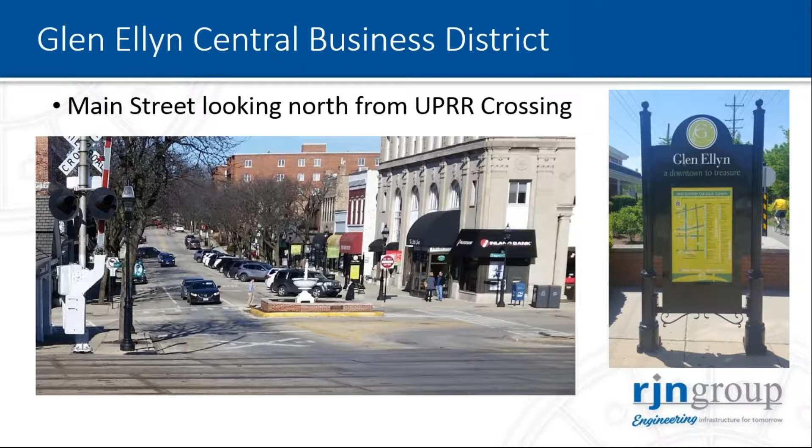There is continuing development interest in downtown Glen Ellyn with some major projects proposed. So there's been no lack of attention to the CBD by the citizen and business communities, and with the recent board approval of a new revenue source, coupled with the previous establishment of a TIF district in the CBD, funding is now in place to move ahead with projects.

The last major makeover of the downtown area occurred in the mid-1980s with comprehensive projects to install curbs and sidewalks, street lights, trees and sidewalk grates, some street furniture and accessories, and resurfaced roadways. Underground work at that time included significant drainage improvements and new water mains to replace or augment existing facilities. Over the years, parking lots have been both reconstructed and rehabilitated.

In 1998, all the central business district roadways were resurfaced, a project that was immediately preceded by various sanitary sewer spot repairs and limited sanitary sewer main replacements. Undergrounding of utility wires has taken place in portions of the downtown area. In addition, sidewalk and tree maintenance are routinely performed on an annual basis.

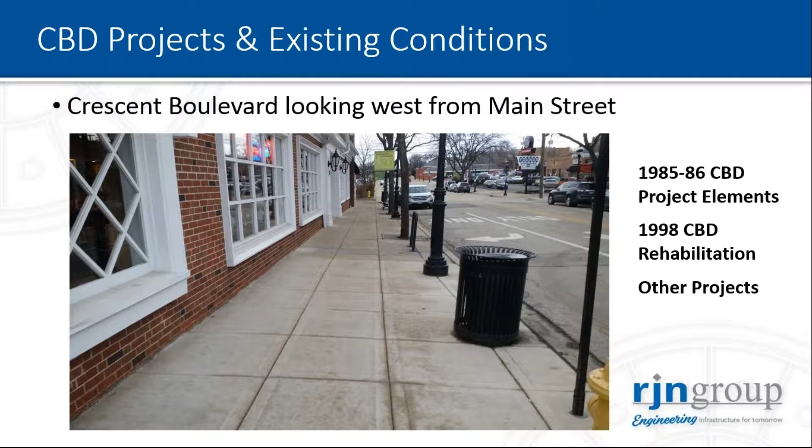So what is our current infrastructure condition? For surface elements, the roadways, sidewalks, and trees are looking a bit tired and exhibiting growing deficiencies. Underground? Well, things work reasonably well for the most part, but there's never been a thorough and comprehensive inventory and examination of our existing systems. We have 100-year-old water mains on Main Street and nearly 100-year-old sanitary sewers.

What is the state of the underground infrastructure overall, particularly underneath the railroad tracks? We have I/I issues. Are there any or many clear water connections in the CBD? Why are there 3 or 4 parallel storm sewers in some corridors? These are some of the many questions that we would like answered.

So as we embark on this major rehabilitation effort in the CBD, we want it to look good, function well, provide opportunities for greater and varied public and business use, and deliver reliable and improved water and sewer system performance. Our first step was to obtain that comprehensive assessment of our CBD underground facilities. The village retained the RJN Group in 2017 to perform a central business district underground utility study, and here to describe that work is Carol Jokas.

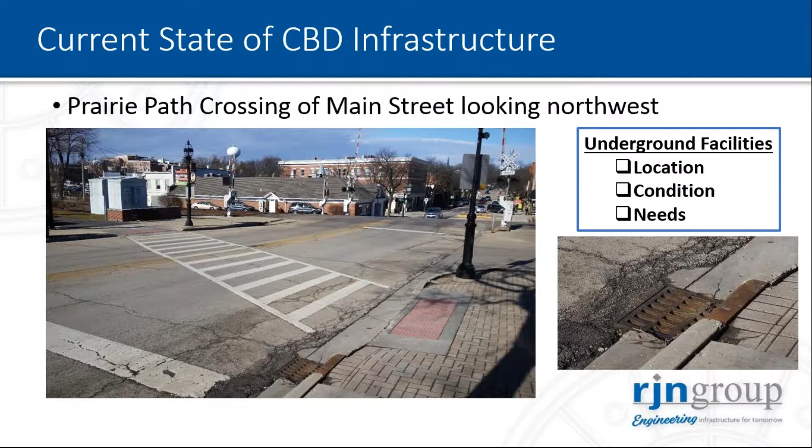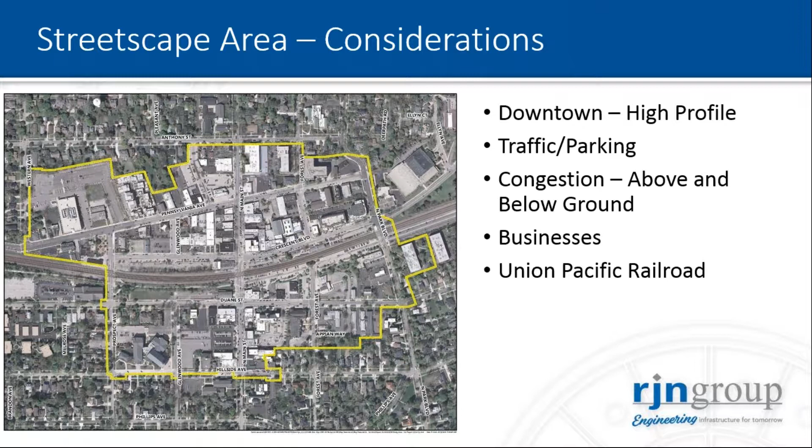Thank you, Bob. So as Bob mentioned, we're looking at the central business district for Glen Ellyn. It's kind of the heart of the village, so this is a very high-profile area. There's a lot of traffic. You have to be concerned about parking. Congestion can be an issue both above and below ground. You have to be concerned about keeping businesses on board with what you're doing. And then, of course, there's the ever-present Union Pacific Railroad that cuts right through the heart of the central business district.

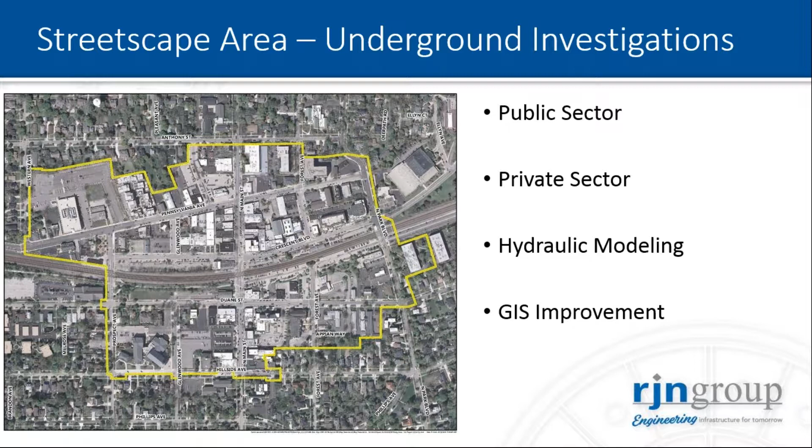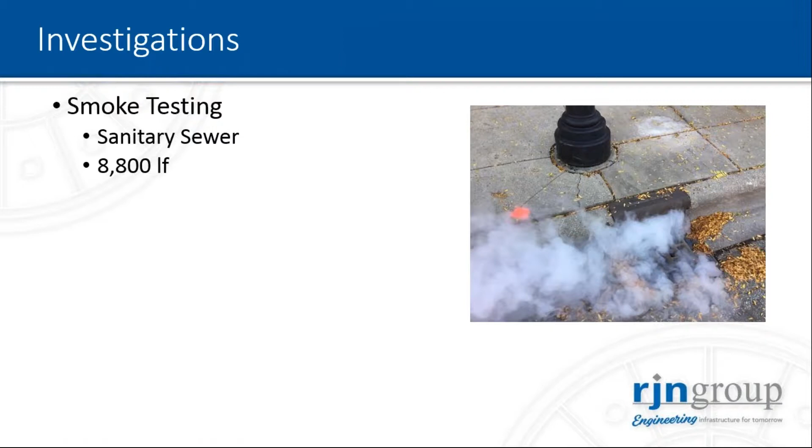So for our underground investigations, we evaluated the public sector and private sector elements, and we did some additional hydraulic modeling for the village, and worked with the village to improve the GIS, their asset inventory of what is there in the central business district. The investigations, many of them, are pretty standard. We smoke tested about 8,800 feet of sanitary sewers in the CBD. Performed inspections of all structures, sanitary and storm, manholes, catch basins, inlets, vaults, everything in the CBD.

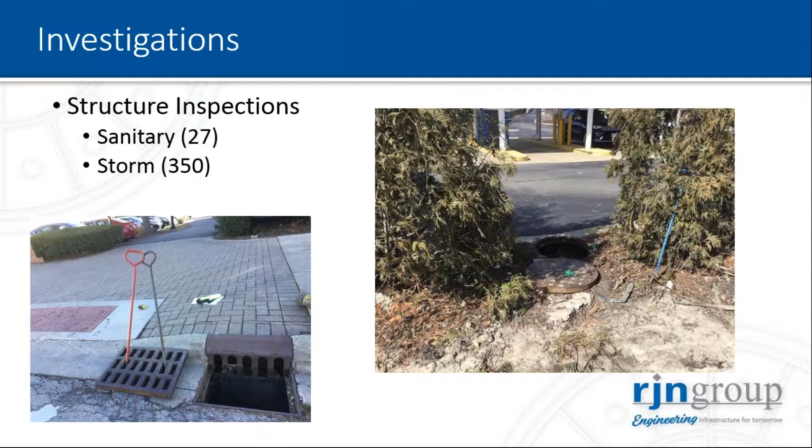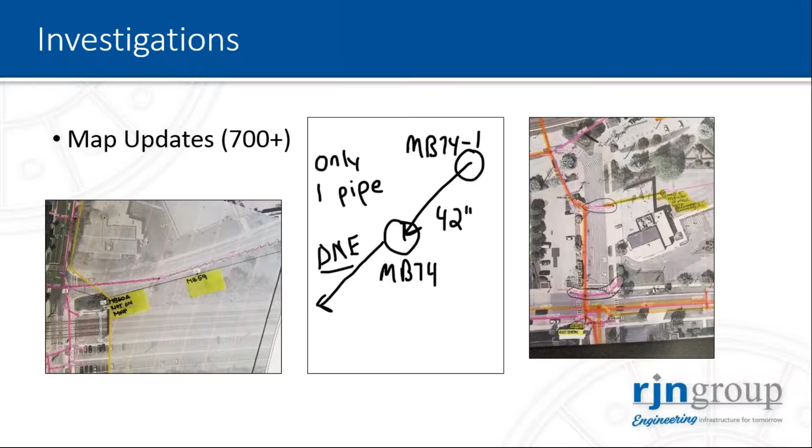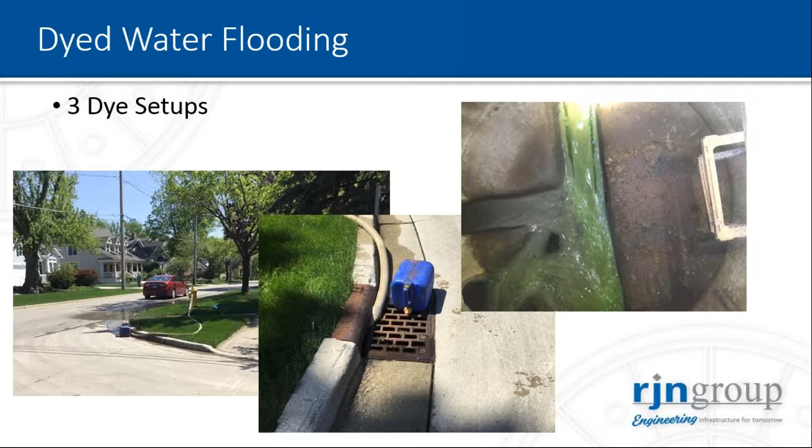And as you might imagine, the more you investigate in an older area of town, the more you find out that your GIS is a little bit lacking. So we had a lot of map updates as we went through this entire process. When you do smoke testing in an area and you find potential storm sewer and sanitary sewer cross connections, what we do is dye water flooding. We did 3 dye setups within the village to try and pinpoint where those cross connections were occurring.

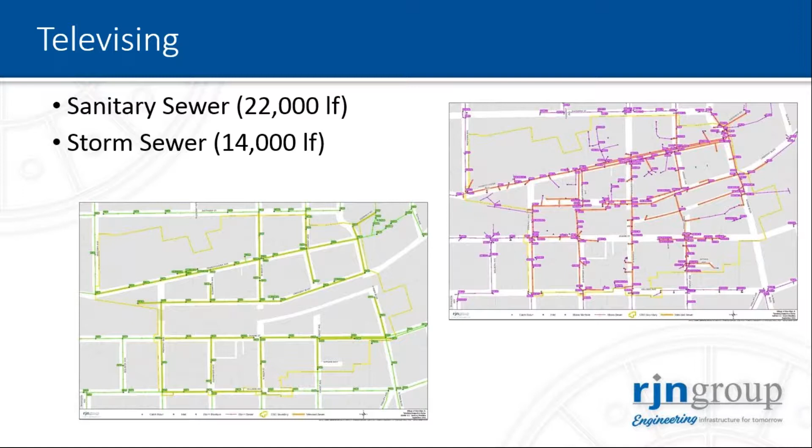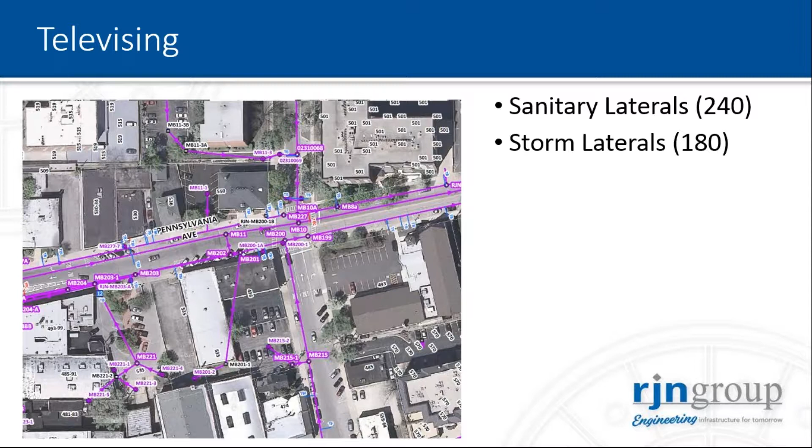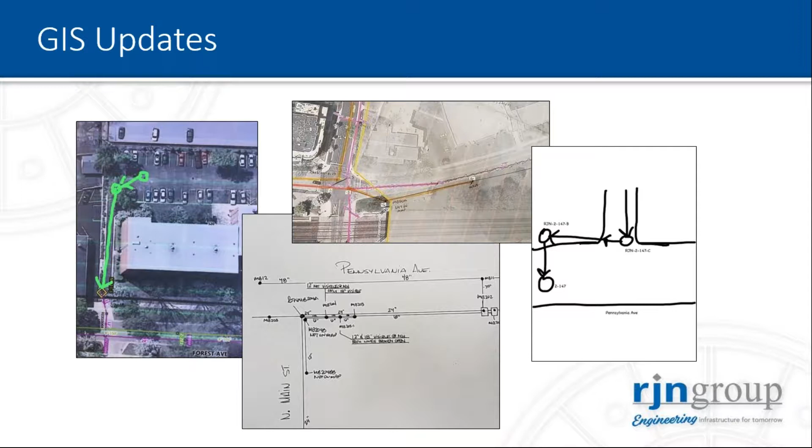All of the sanitary sewer and the storm sewer in the CBD was televised. That was done by Michaels. And all of the laterals in the village were televised, sanitary laterals and storm laterals. And the televising encompassed all of the pipes, even everything connecting catch basins and inlets and all of those little short pipes in the storm system. Again, a recurring theme. The more you investigate, the more changes to your GIS you're going to find. New structures, structures that don't exist, different connections, different directions. A lot of work was done to update the GIS for the village.

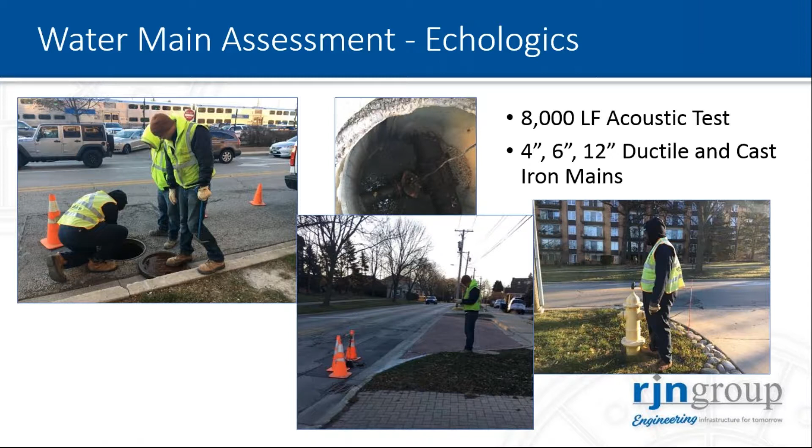The water mains in the central business district were assessed. Selected ones were assessed by Echologics using acoustic testing. That's of the ductile iron and cast iron mains. About 8,000 linear feet were tested. Note that not all of that was in the CBD. Some of that testing was done in an area outside of the CBD, but a total of 8,000 feet were tested.

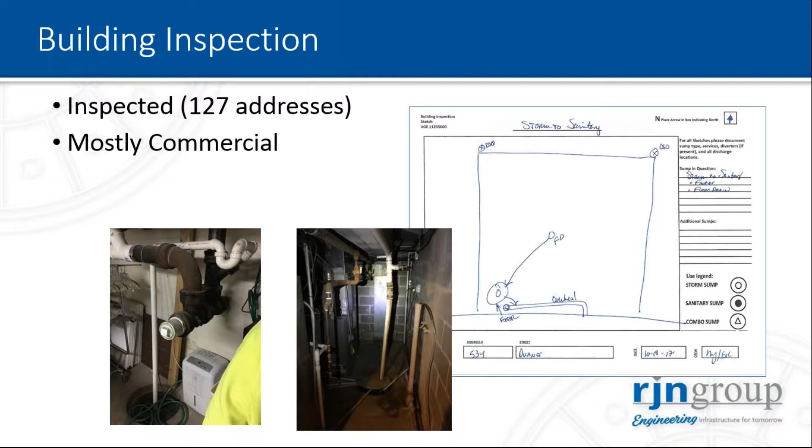And, as Bob mentioned, it's important to know that all the connections to your sanitary and storm sewers are legal, are in good shape, and you want to know that all the connections into those systems are proper. So building inspections were performed, and these are mostly commercial buildings, many of them quite large. And these are very involved inspections. About 127 addresses were inspected in the CBD.

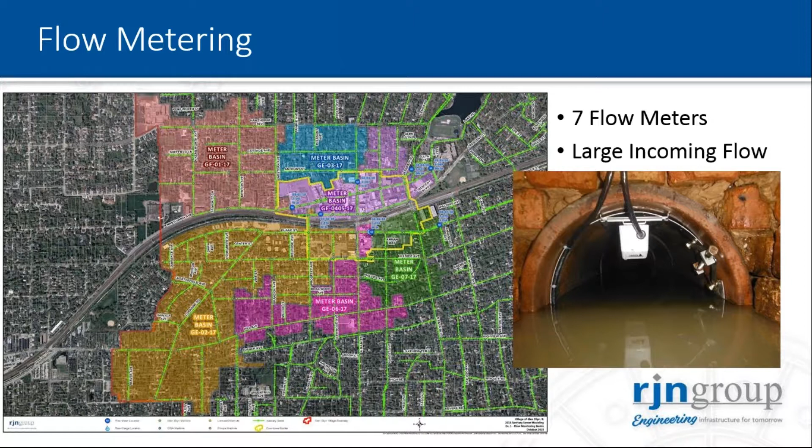Flow metering was performed, and as you can see, the CBD is identified by that yellow outline. Most of the flow is coming from outside of the CBD. It's kind of a pass-through area. It comes in from the northwest and south and then exits out the east. 7 flow meters were installed for a 90-day metering period.

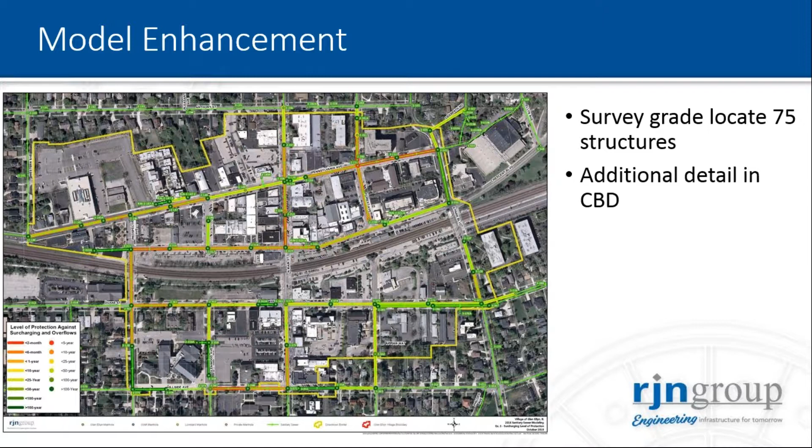And the sanitary sewer model that RJN has developed for Glen Ellyn, that model is a village-wide model, but the Central Business District area was updated and enhanced. Some additional survey grade locates were performed within the CBD, and that survey grade locate was done on the sanitary manholes, but also we picked up many storm manholes for enhancement of the GIS.

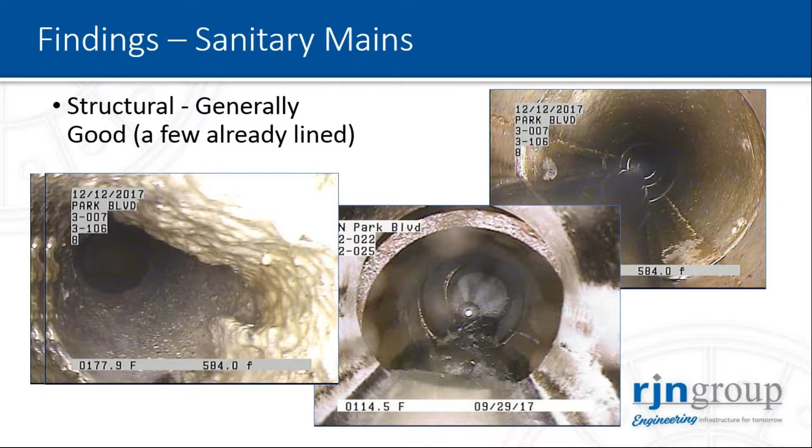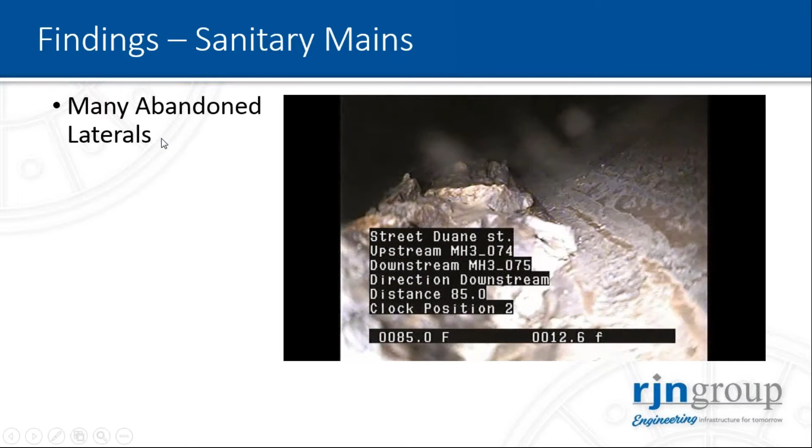However, there are... oh shoot, sorry, I'm gonna turn the volume off. Here we go, sorry about that.

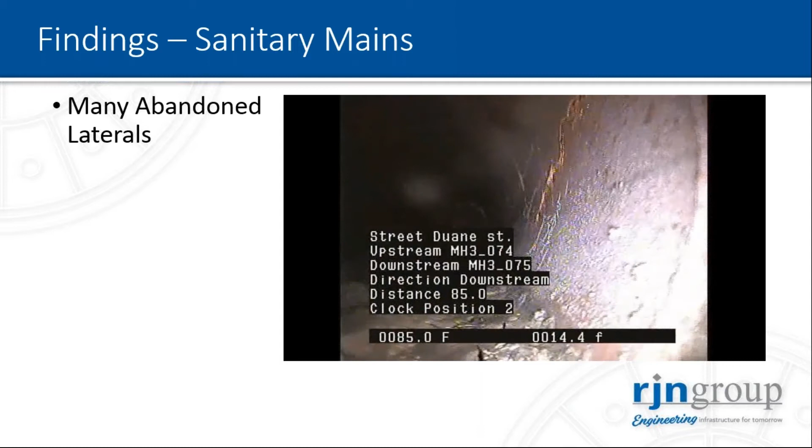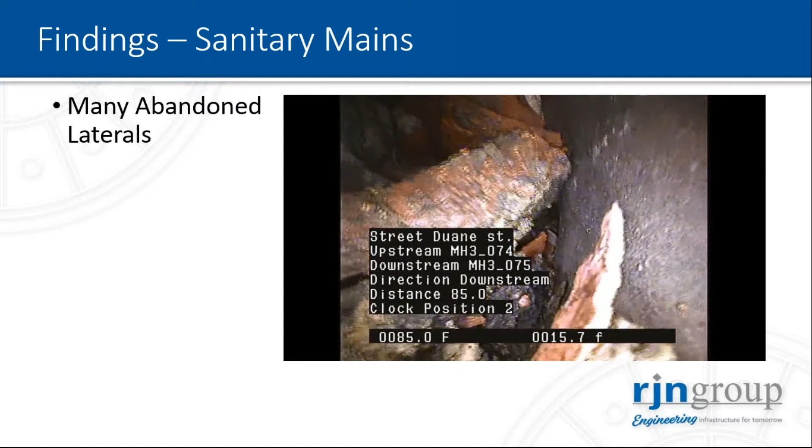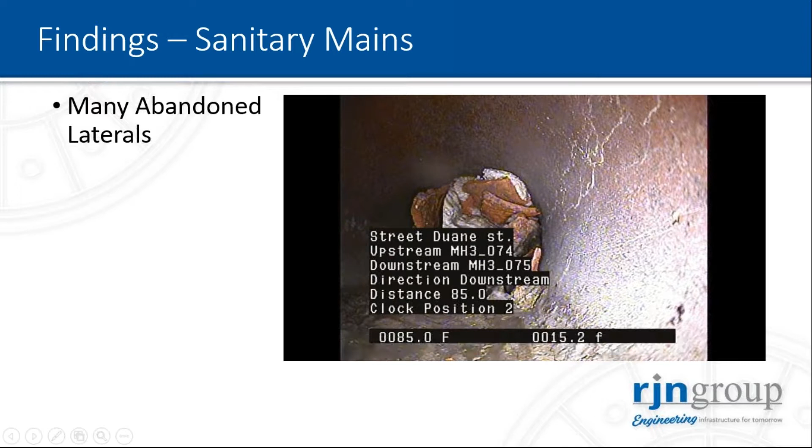What we find in many communities, once you start actually looking at the laterals, is that the laterals are not in very good shape, and there are many lateral connections that go up 15, 20, 30 more feet that are then abandoned. Here we have a contractor's cap special. This is an abandoned lateral. And this is the kind of thing that you don't want to see.

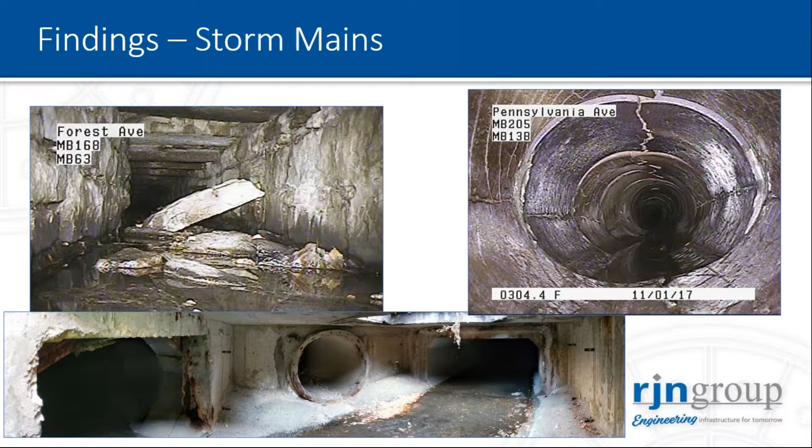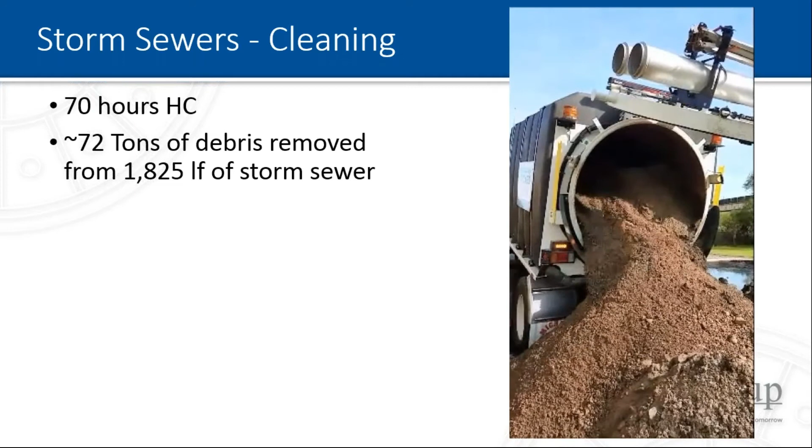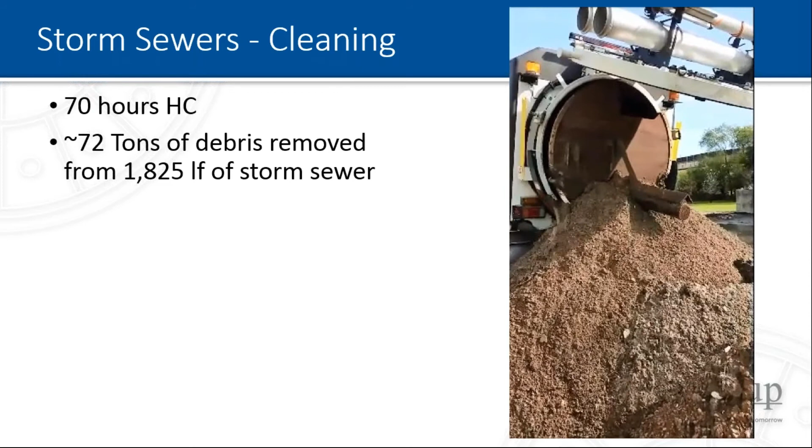One of the other things that we typically find in storm sewers is that they are fairly dirty. This video is actually showing debris from Glen Ellyn. This is one of these recycling jet vac trucks. That's why it looks so dry. But basically, about 72 tons of debris were extracted from about 1,800 feet of storm sewer.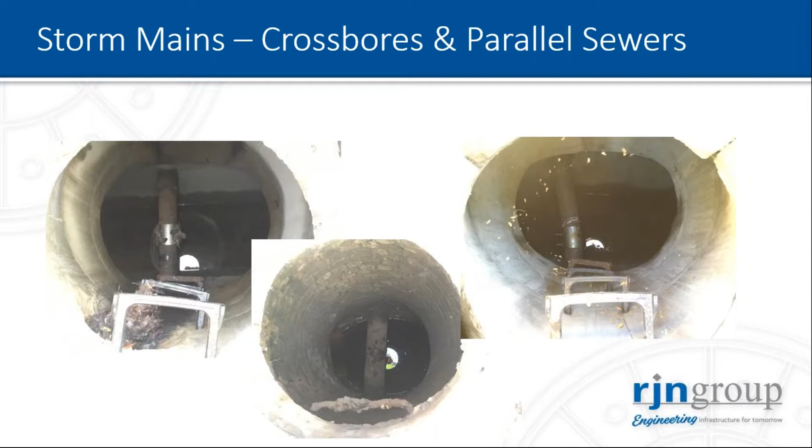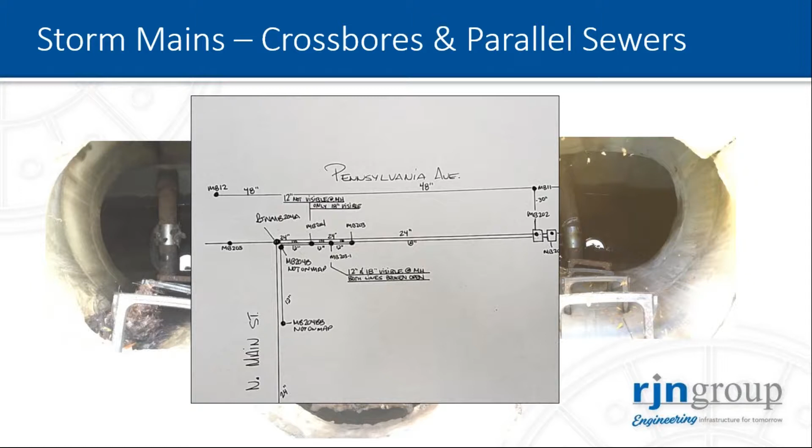We also identified many crossbores. You can see those two pictures on the outside. Those are actually laterals going through the storm sewer. This one on the bottom is a sanitary sewer that goes through a storm sewer. And Bob mentioned this earlier, but on Pennsylvania, there is a location where there are 4 parallel storm sewers in the street, which is something that will be looked at as we go forward with this process.

Connections in the storm mains is another recurring issue. Generally, contractors just bash a hole in the side of the storm sewer and shove a pipe in. And yes, you're not really worried about I&I, but this can, of course, lead to some structural issues down the road.

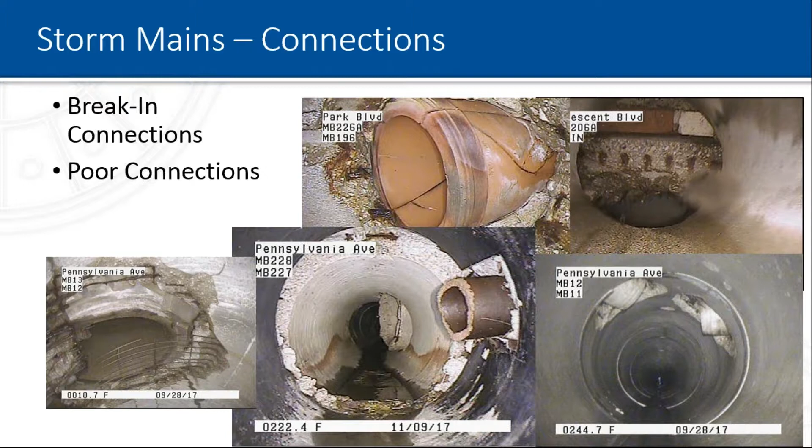And what we found was that there was a little bit higher rate of illegal connection in the Central Business District than what we typically find. Typically, we see about 6 or 7% of illegally connected sump pumps, but we found it was a little more than 10% in the central business district.

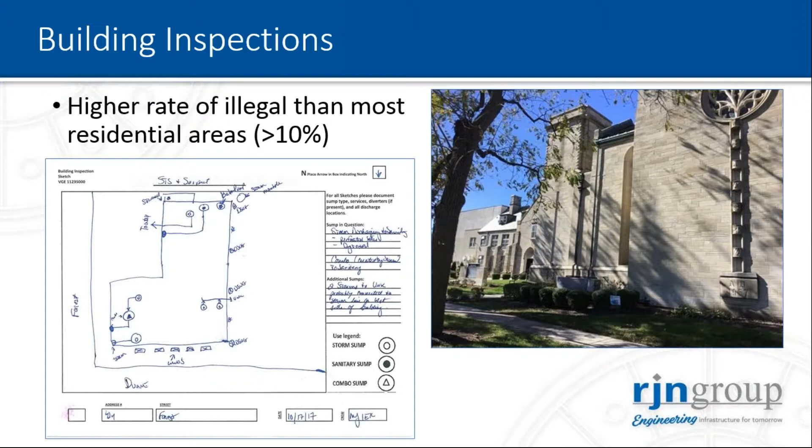Okay, sorry, I'm going to shut this down again too.

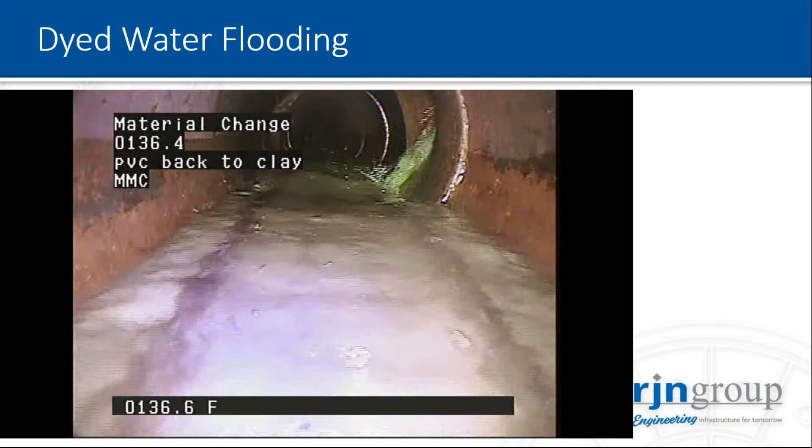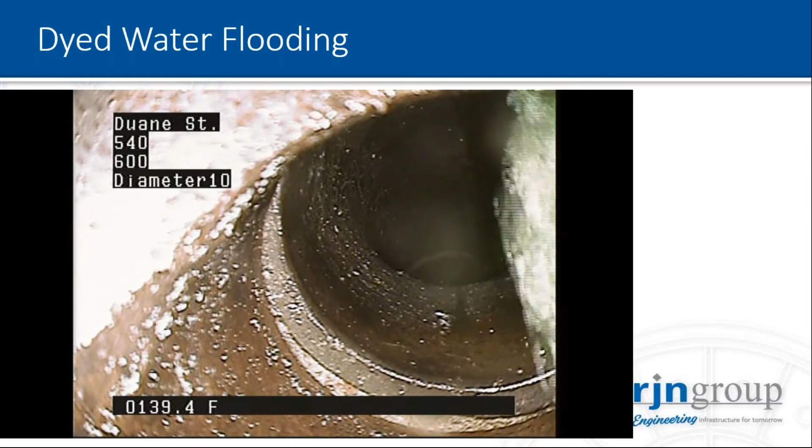Dyed water flooding, which I talked about, where we're looking for connections between sanitary and storm sewers. So this is a video showing the dyed water flooding of one of those connections. And we look up the lateral, and this is, again, frequently what you see: the lateral crosses the storm sewer, leaks, and the flow is coming right in the lateral.

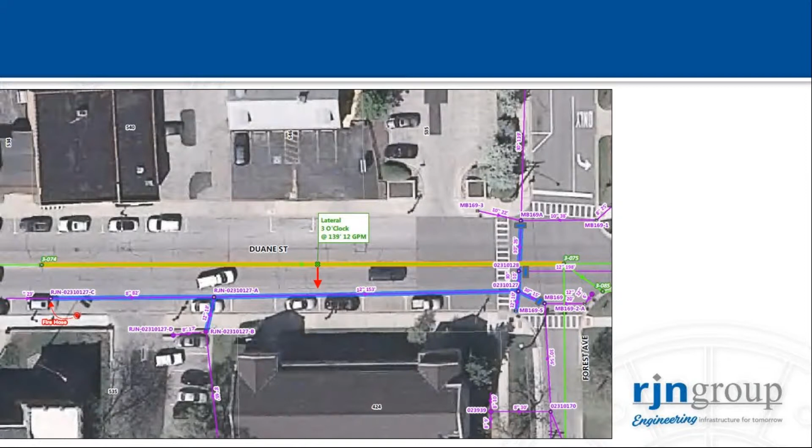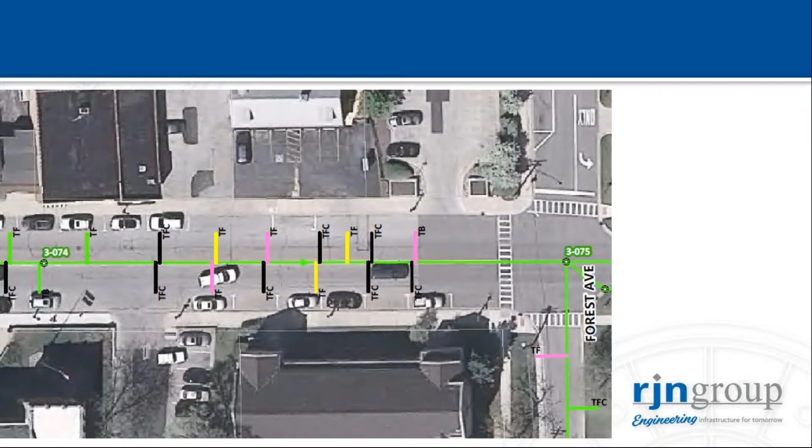So then if we look at where that is, that arrow shows where the lateral came in, where the flow was entering the sanitary sewer, and the lateral heads to the south. And because we did televising, we can see where all the laterals are, and that's the lateral we're interested in.

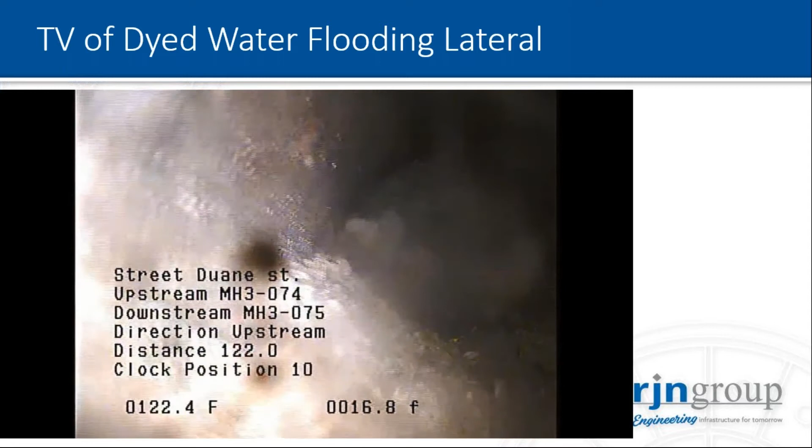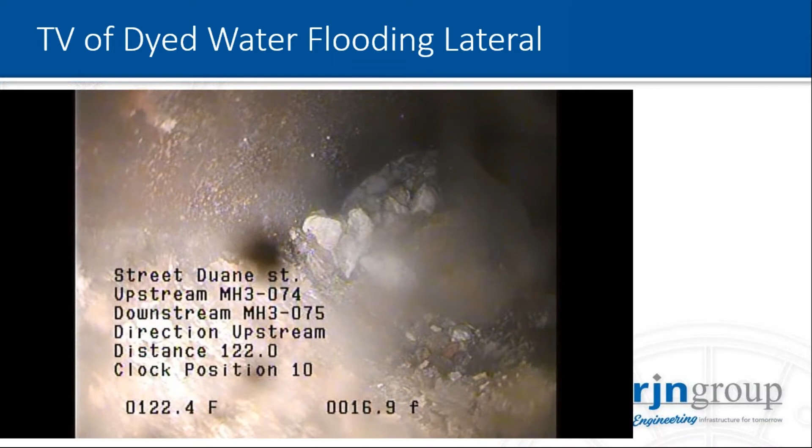So because we've televised all the laterals, we can also see what's up that lateral. And yes, you can see that this is actually an abandoned lateral. It's plugged, and it's pretty clear that the flow is most likely coming in at this joint, this large separation that shows up here.

The water main assessment that was done by Echologics provided the village with some inputs on the condition of their water mains, basically rating them as good, moderate, poor. And on the cast iron mains, Echologics can provide an estimated remaining life. They cannot do that for ductile, but they can do that for cast iron.

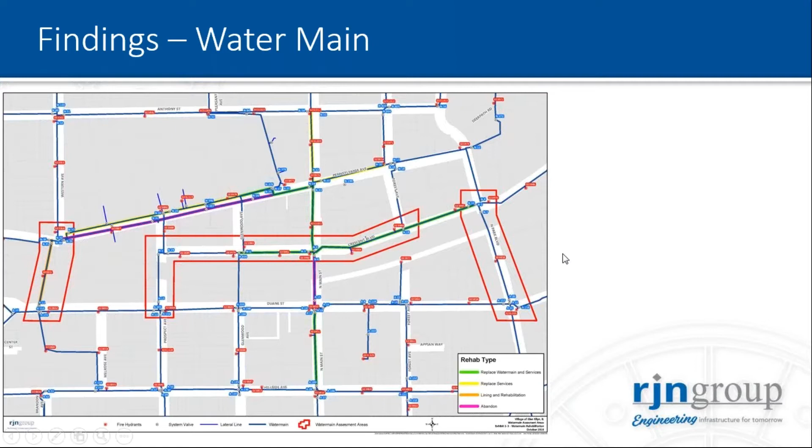And primarily based on that Echologics study, plus other internal knowledge that the village had regarding main breaks and age of water main, the recommended rehabilitation is shown on the map there. The sanitary model that we did was all updated and recalibrated to the new flow meter data that we had, and incorporated all the new structural findings from the CBD study.

One of the other things that we'll look at is level of protection against surcharging and overflows. And again, some areas where surcharging and overflows could potentially be an issue based on what the model is saying. We also look at level of protection against potential basement backups in the area. And again, there are some potential areas of concern for a 6-month or a 1-year storm in the central business district. And then looking at the 5-year storm, places where the flow is going to exceed capacity of the existing system.

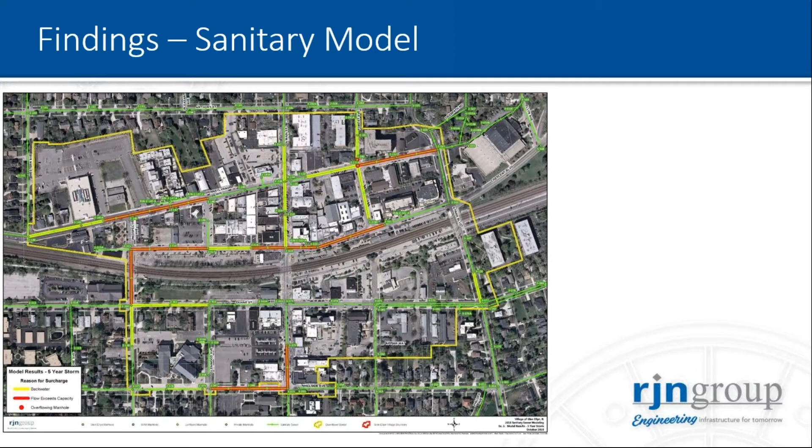So there's a few items that we have left to complete. For any of you who have done building inspections in the past, you know how difficult it is to get inside those last few buildings. And we still have a few buildings that we need to inspect. There are a few straggler storm lateral TV inspections that need to be performed, and then dye confirmation of connectivity, both for building inspection and of some of those lateral connections, just to confirm where each building discharges into the sewer.

So the recommendations provided to the village include sanitary and storm rehabilitation and replacement of both mains and structures, lateral rehabilitation or replacement for both sanitary and storm. Again, one of the things that RJN harps on is sealing those abandoned sanitary laterals, rehabilitating select water mains and water connections, and removing illegal private connections.

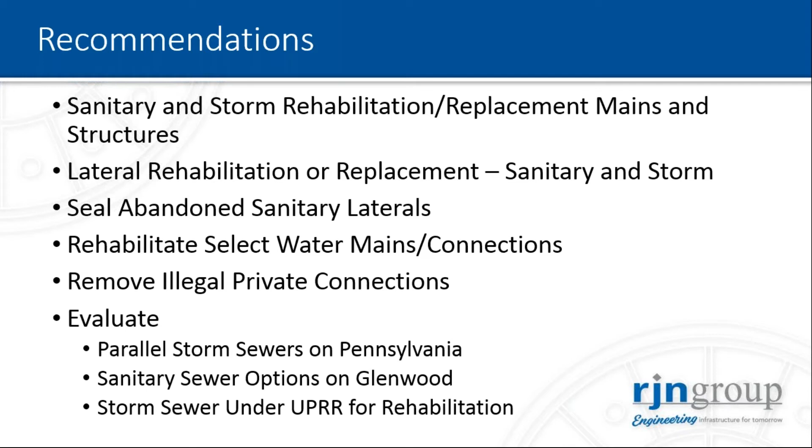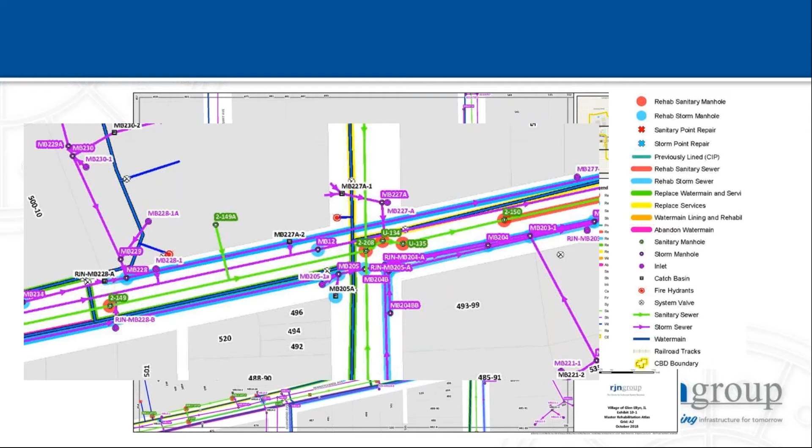So at this point, we're looking intersection by intersection, block by block. This just gives you an idea of how complicated some of these intersections are in the Central Business District. This is showing just water, sewer, and storm. It does not show gas or electric or any of those other utilities that we all know are there. So there's a lot going on underground. I'm going to pass it back to Bob, and he's going to finish us up.

Thanks, Carol. So going forward, as the underground study was nearing completion, village engineering staff prepared a request for proposal for detailed design of CBD streetscape and utility improvements. The utility component is based on the results of the CBD underground utility study performed by RJN. The streetscape component includes geometric and physical improvements to streets and sidewalks, on-street parking, street lighting system, trees and tree planters, signage, and a variety of other streetscape elements consisting of benches, bike racks, litter receptacles, and retaining walls.

Following the receipt and review of proposals, interviews were conducted with 4 firms. A phase 1 contract has been awarded for the project to a team led by Civiltech Engineering, with RJN as a primary subconsultant for utility design work. Important milestones include phase 1 completion in the spring of 2019, phase 2 design work throughout the balance of 2019, and construction of improvements starting in 2020. This is an exciting undertaking for the community and project team. Wish us luck.